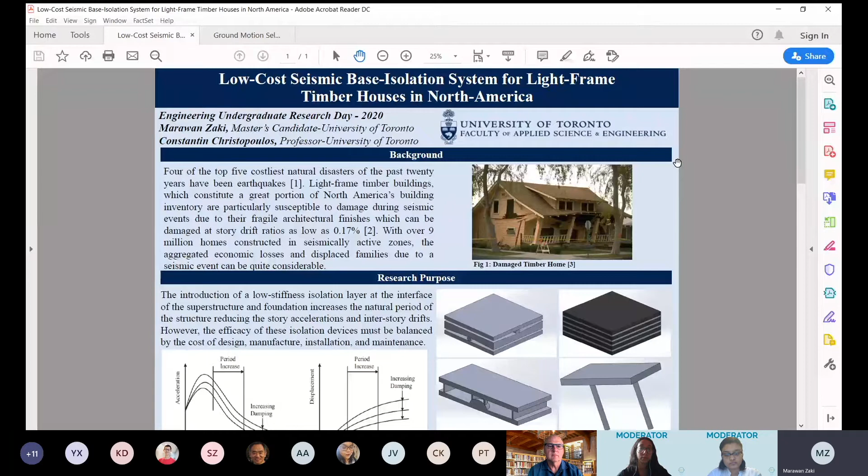I'm currently a master's student at the University of Toronto's Department of Civil and Mineral Engineering. I'm working with Dr. Constantin Christopoulos, who's a professor of seismic engineering and seismic resilient design. And our research topic is low-cost seismic base isolation systems for light frame timber houses in North America.

So let's start with a little bit of background. According to The Economist, over the past 20 years, 4 out of 5 of the top 5 costliest natural disasters have been earthquakes. Case in point, the 1994 Northridge earthquake, which occurred in California and caused over $48 billion worth of structural and non-structural damage and displaced over 60,000 residents from their homes.

Roughly half of these losses were attributed to light frame timber buildings due to their fragile architectural finishes, which can be damaged at story drift ratios as low as 0.17%, even though the code allows us to go much higher to almost 2%. With over 9 million of these homes constructed in seismically active zones in North America, the aggregated economic losses and displaced families due to a seismic event can be quite considerable.

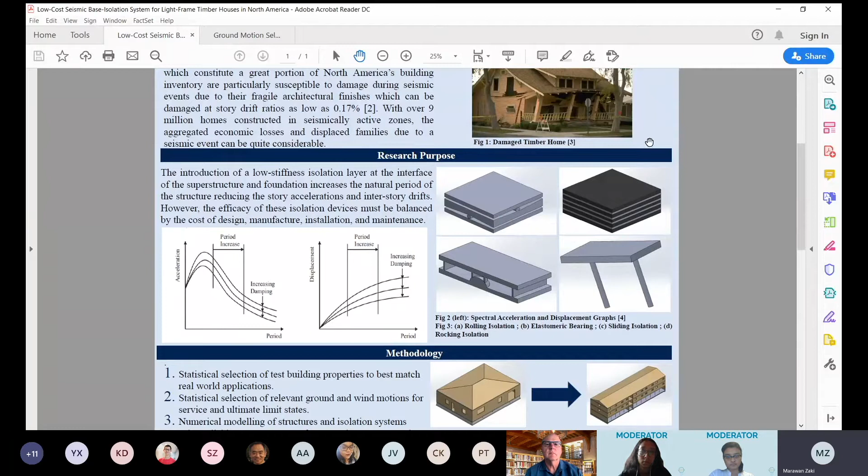The figure on the right over here shows a building which was damaged during a maximum considered earthquake, and this could have been prevented had there been an engineered solution. So how can we protect homes like this and others like it? Well, by introducing a low stiffness isolation layer at the interface of the foundation and the superstructure, we can reduce the force experienced by the building by decoupling the ground and the structure's motions.

If you take a look at the graph on the left over here, an average building has a period of 0.2 to 0.6 seconds. With an isolation layer installed, we can have a period of 1.5 to 4 seconds, greatly reducing the accelerations, and by F = ma, greatly reducing the forces. However, we do pay for that with an increased displacement. But again, we can control it with an increased damping system, as well as providing a moat which allows the house to move without being damaged.

We must also balance this by the cost of designing, manufacturing, installing, and maintaining these devices, as they can be quite expensive and hard to massively implement. So on the right over here are the 4 devices that we're looking to test and study.

The device on the top left and the bottom left are rolling and sliding isolators respectively, and they work very similarly. The top steel plates shown here and here will be attached to the superstructure, while the bottom steel plates shown here and here will be attached to the foundations. During an earthquake, they'll be allowed to move independent of one another based on these articulated PTFE sliders or rollers.

And the shear transfer and deformation characteristics of these isolators will be primarily controlled by the coefficient of friction of the steel surfaces, mu, which ranges between 0.03 and 0.2. We can also further increase the effectiveness of these isolators by introducing curvature to the bottom of the plate, allowing the devices to recenter themselves after an earthquake, which I'll describe later why it's so important.

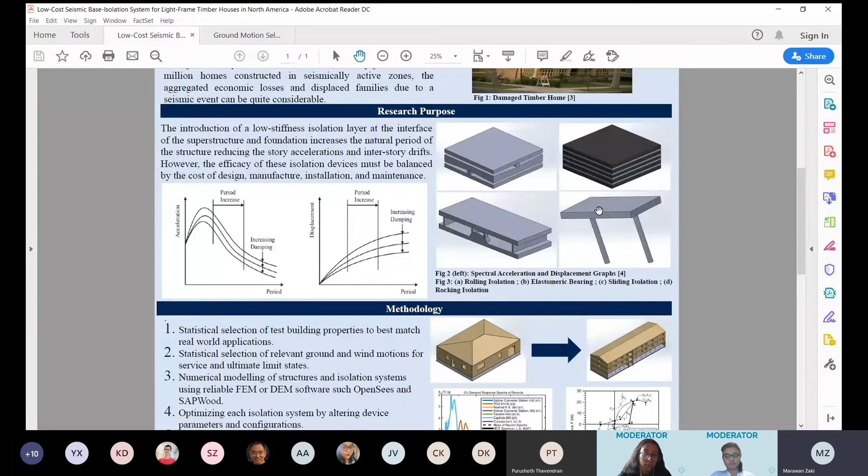And on the bottom right over here, we have a rocking isolation system, which utilizes geometric ductility to counteract the earthquake, essentially creating what we call a controlled soft story mechanism. During an earthquake, the columns, which are attached to the foundation, are allowed to rock about the base connection due to yielding screws, which act to dissipate the energy of the earthquake due to the hysteresis. This rocking is mainly controlled by the geometric properties of the column, including its height, width, and mass, and so can be really accurately engineered to suit each building.

So this project is still in the beginning. I just started it in May. However, we've identified 6 key steps for the success of this project. First is the statistical selection of test building properties to best match real-world applications. Based on a literature review, we decided to go with the CUREE-Caltech index building designs that were done by Dr. Filiatrault of Buffalo University. We chose 4 buildings, the small bungalow, all the way up to the multi-story apartment complex.

Second will be the statistical selection of relevant ground and wind motions for service and ultimate limit states. This will be done in accordance to ASCE 7-10, as well as the PEER Ground Motion Database. Third, we'll be doing numerical modeling of the structures and the isolation system using a reliable finite element model or discrete element model software such as OpenSees and SAPWood.

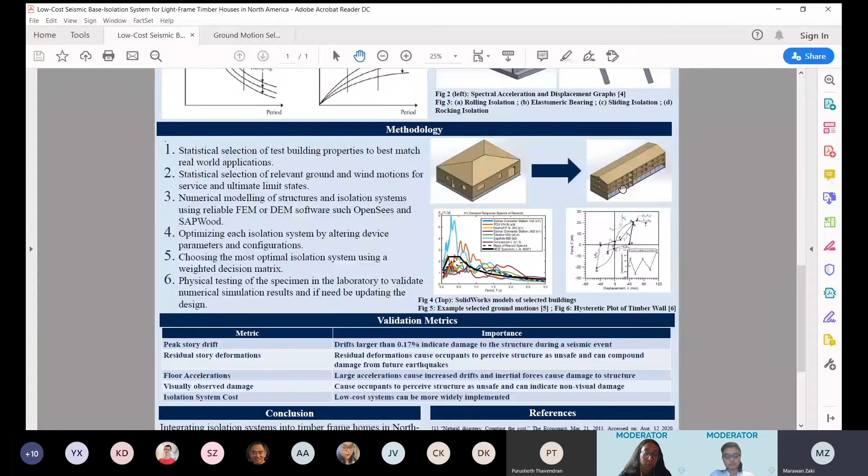We will then go about optimizing each isolation system by altering the device's parameters and configurations, including materials, dimensions, and integration with the building. After we've optimized each system individually, we'll choose the most optimal isolation system using a weighted decision matrix focusing on cost and performance. And finally, we'll be doing physical testing of the specimen in the laboratory to validate our numerical simulation. And if it's successful, we'll put forth a design methodology.

In terms of the validation metrics that we're going to be looking at in order to determine the efficacy of our systems, we will be looking at peak story and residual story drifts, as drifts larger than 0.17% can indicate damage to the structure, as I mentioned before, and residual story deformations can compound damage from future earthquakes.

We'll also be using accelerometers to measure each floor's acceleration, as large accelerations carry large inertial forces, which can cause damage to the structure. And finally, we'll be looking at the visually observed level of damage during testing, due to the fact that large observed damage can cause occupants to perceive the structure as unsafe and can indicate non-visual damage. And we'll be balancing this all with the isolation system cost, as a low-cost system can be more widely implemented.

So overall, this project is in the very beginning stages. However, I do believe if it's successful, we can prevent potentially billions of dollars worth of damage and displacement due to earthquakes. And for mass implementation, we want to have a low-cost, reliable, and easy-to-install isolation system, as well as a design methodology to accompany it.

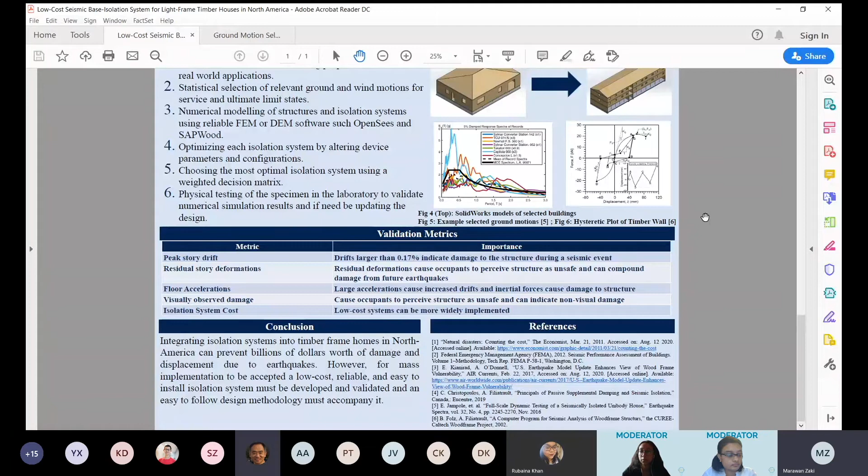However, what designers in the seismic field are now looking at is performance-based design, or resilience-based design, which is not only to minimize loss of life, but also minimize damage to the structure. So for example, going back up here, we can see that the structure is still standing, the occupants would be safe. However, it's unusable and would have to be torn down and would cost the home occupants millions of dollars. So I certainly think that something like this project would move the needle towards performance-based design and hopefully focus more on the economic side as well.

Thank you, Marawan. Hey, Marawan, it's Professor Evans. Wonderful presentation. Interesting to see the results.

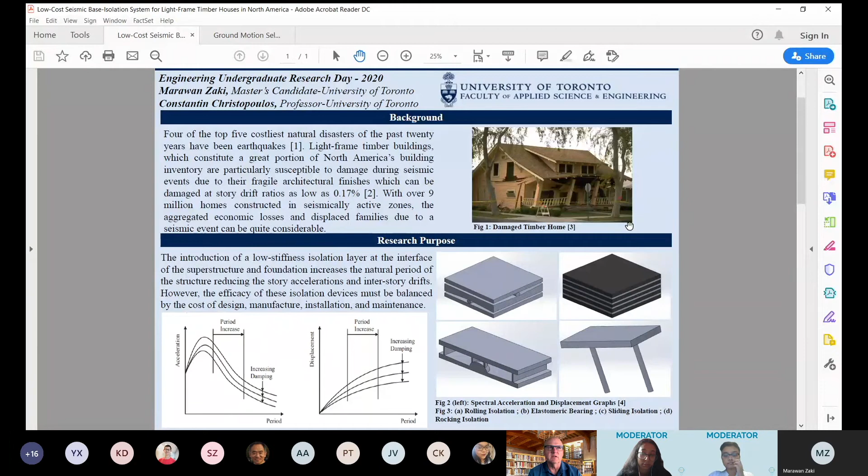I like that you're going to be doing a combination of computational and then some physical testing. So I have two questions for you. One, I didn't quite understand what you meant by statistical selection of conditions for wind or for ground displacement. And then there's a second question, which is about the scaling. When you do physical testing, what scale will you do this at, and how do you think about scaling it up to the size of full-size buildings?

Yeah. So to talk a bit about the statistical selection of the ground and wind motions for service and ultimate limit states. Currently, the ASCE or the Canadian Building Code do give us a way to calculate what we call the response spectrum, which is this black, really clean line that you see over here. However, it's kind of a blunt instrument. It's based on approximations of the soil characteristics, the site characteristics, and the building characteristics.

So what we can do to make this a little bit more accurate is to look at other earthquakes that had occurred in the past and in different regions, and try to compare them and really hone in on the most relevant earthquakes. So to do that, we go through a database and we filter through multiple layers in order to get the most accurate and most representative earthquakes.

And as for the scaling of the tests, we are actually following in the footsteps of some other tests that have been conducted out of Stanford University and Buffalo University. And for those tests, they actually were able to do full-scale testing. So they had buildings that were perfectly modeling their conditions. At the University of Toronto, I don't believe that we have the space in order to accommodate that.